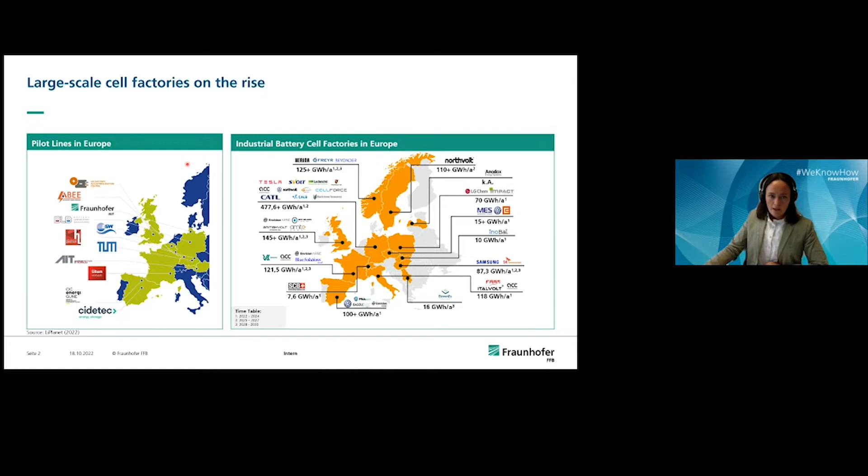The maturity of technologies can be defined by the TRL, the technology readiness level. While lab production tends to be in the lower TRL level, the large-scale production are on the higher TRL level. And the target of the Fraunhofer FFB is to map a range between a TRL 5 till 6 up to TRL 8 till 9, so that the technologies of different partners can be developed for industrial use.

As we are showing here on the slide, we are working together with some partners to implement new technologies and innovations into the production line. For example, we are working in the field of new production processes together with the RWTH Aachen, in the field of new battery concept with the Fraunhofer Battery Alliance, and in regards to new active materials, for example, with the MEET here in Münster. The target of the Fraunhofer FFB is to enable the technologies from these partners for industrial applications on a large scale.

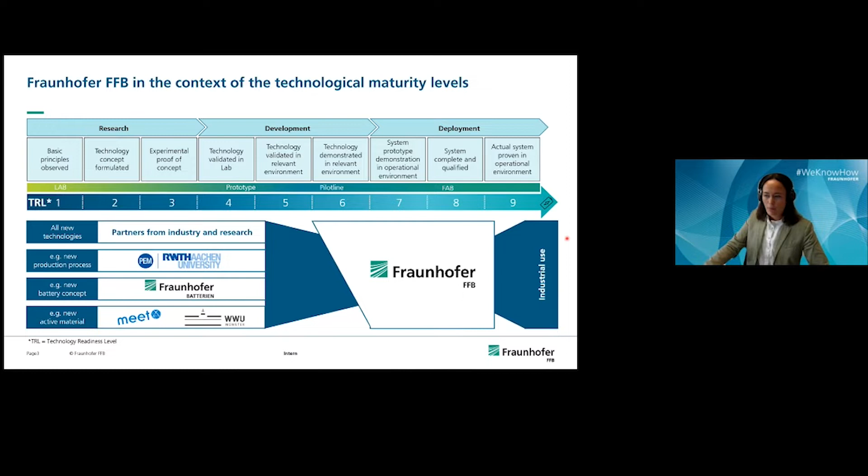At the beginning, the new technologies are further developed at the Fraunhofer FFB in so-called innovation spaces. Here we start, as I already mentioned, with a TRL 5 or 6, and the innovations or technologies can be operated in the innovation space totally on themselves regarding to the production line. So, for example, when we are developing a new drying process, we take the slurry from the production line, operating a new drying process, and then implement the dried electrodes into the cells from the production line. Therefore, a comparison is possible between the conventional process in the production line and the new technology in the innovation space.

When the technology is ready and fulfills the requirements of the production line, we integrate those technologies into the smallest production line at our equipment. Here we are operating with a TRL 6 or 7, and we validate the technologies in a running production process. When the process or technology is then ready, we optimize and implement it on a larger scale, and then we scale it up to the large scale of an industrial production to then run it in an industrial scale. So the Fraunhofer FFB maps the technological transfer and scaling process through diversified plant technologies.

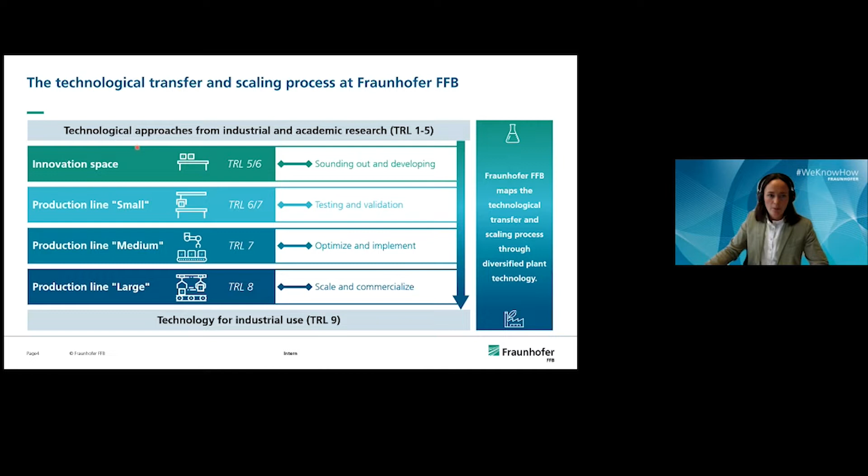To reach this target and to develop those technologies step by step, we need, of course, a big infrastructure. Therefore, we built up some equipment here in Münster at different buildings. We are starting in the electrode field with the largest production scale with two production lines on the electrode manufacturing side. And then we have additionally one medium coater and dryer with a speed up to 30 meters per minute, and the smallest line which is running with 10 meters per minute.

Additionally, we built up here three production lines for all three cell formats: the 21700 cylindrical cell, the pouch, and the prismatic cell. Theoretically, we could produce 7 gigawatt hours per year. This is the machinery capacity.

But realistically, we are operating this machinery totally differently in comparison to the industry. For example, we will not be producing in a 3-shift system. But for technologies and new innovative materials or processes or sensors, it could be possible to integrate the sensors or processes into the big scale and also validate them on a really industrial scale and also in a 24-hour system.

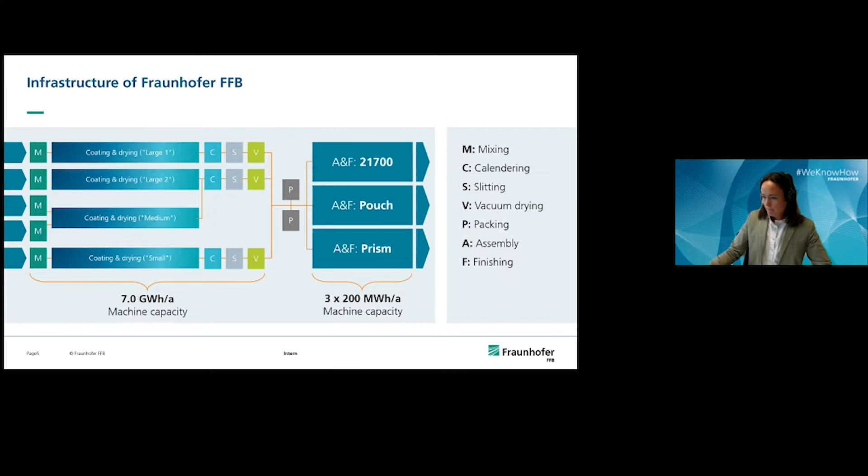Here we listed some process parameters of our different machinery equipment in different buildings. So we start today with the FFB workspace. This is a building already built up here in Münster. We rent a room, a dry room, a clean room, to build up some electrodes here at the space in Münster. Then the next building will be the FFB PreFab.

Here we scale up to a small production line. And here we are implementing the first innovations at Fraunhofer FFB. And then the large-scale production will be built up in the FFB Fab. Here we integrate the biggest equipment of our infrastructure. And also here we are producing all 3 different cell formats.

But of course, the conventional battery cell production technology also has its disadvantages and challenges and offers great potential regarding cost and energy demand, particularly in Europe. For this reason, the Fraunhofer FFB is driving a technology change in the equipment concept.

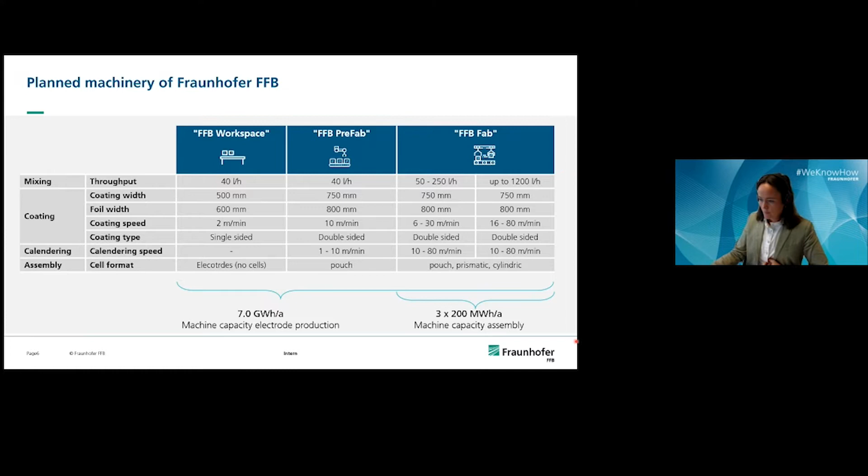For this purpose, a heat map was drawn up, as already presented by Mr. Degen, in which the main cost drivers in battery production were identified. In addition to the dry coating process, I would now like to show you how technologies are developed at the FFB from lab to fab with the example of the alternative drying technologies.

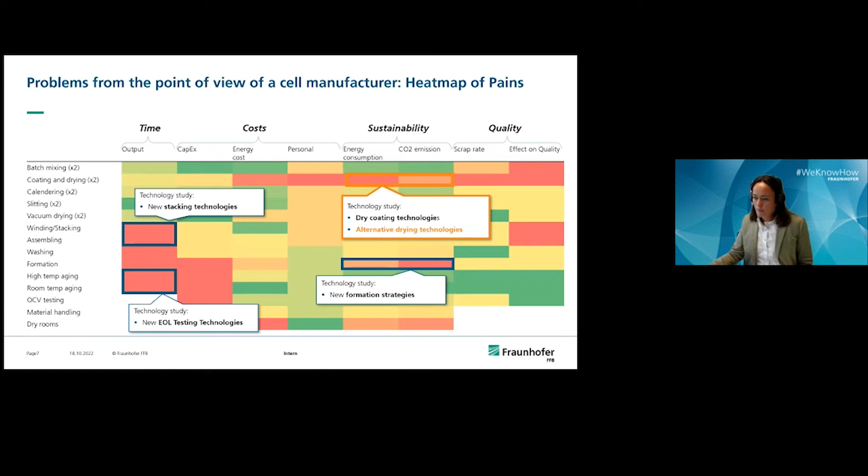Furthermore, the drying process needs a really long heating time to ramp up the dryers. So today we need more than 20 minutes to heat the dryers up to a process temperature of up to 80 degrees. So we need a long ramp-up time to run this process.

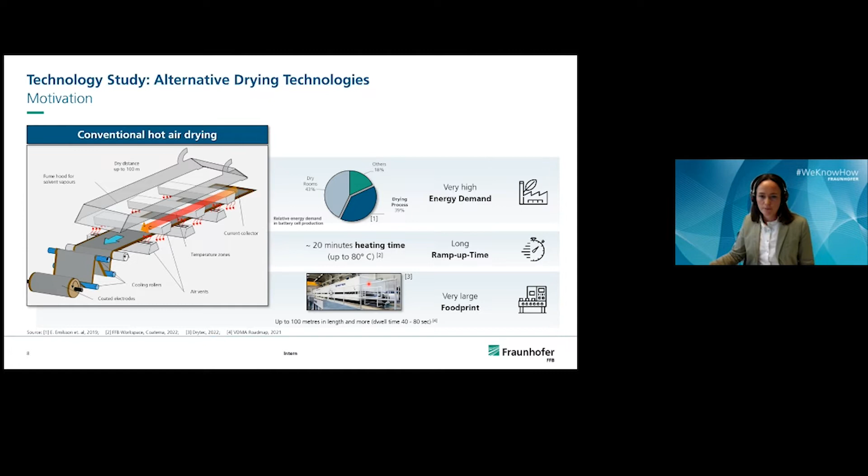And the last disadvantage of this conventional process is the very large footprint of the dryers. So today we need more than 40 seconds dwell time in the dryer, so we need more than 100 meters in length for the dryers. And this is a really big footprint in the cell factory, which we would like to decrease.

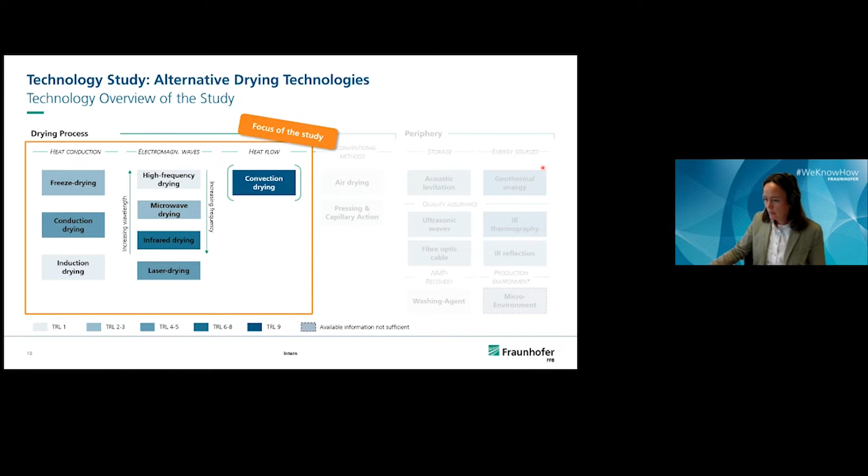And we compared some other technologies, for example conduction drying, induction drying, and also drying technologies with electromagnetic waves, for example microwave drying, infrared drying, and laser drying. As a result, we compared these technologies regarding the parameters development status, cost efficiency, process performance, and product quality. And here we benchmarked the technology alternatives.

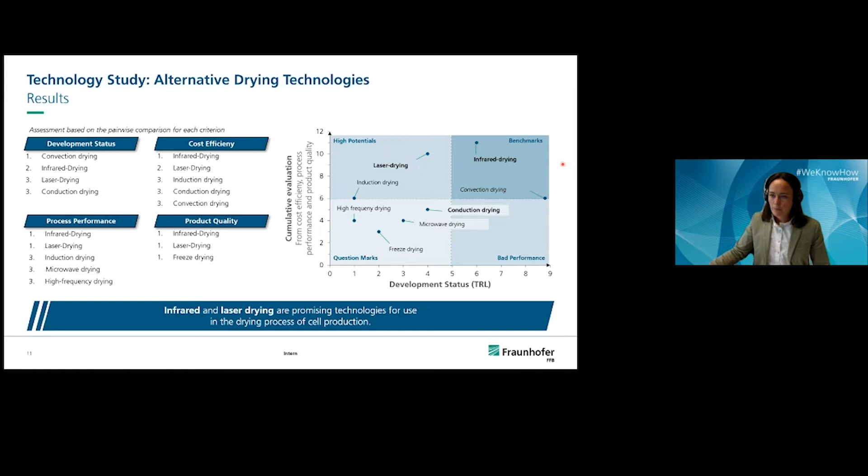And as you can see, laser drying and also infrared drying are the most promising technologies for us to optimize the drying process. Laser drying, for example, has a really low energy demand, as does infrared drying, and they have a really fast ramp-up time. When we compare both technologies, with infrared drying we have an infrared emitter. This infrared emitter has electromagnetic waves in the near infrared range between 800 and 3000 nanometers.

And yes, it's suitable for both anode and cathode applications and is already used in series production as a booster. So the technology is not ready for completely drying the electrode, but it's integrated in the conventional process to speed the process up a little bit.

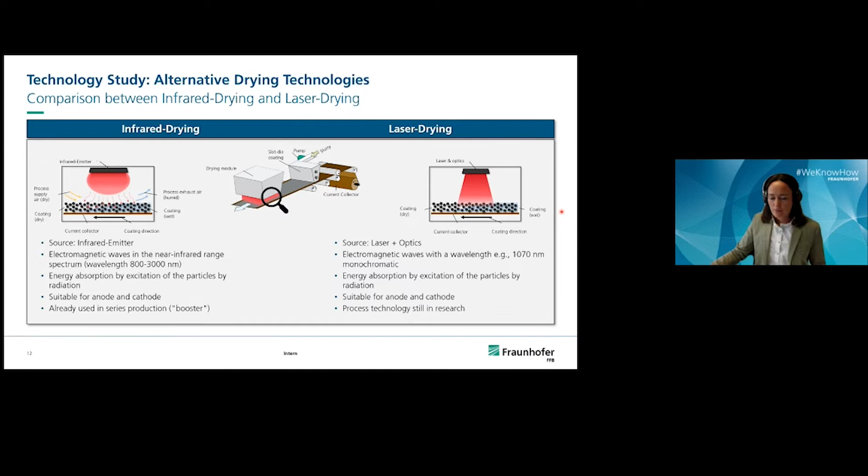Then the laser drying: we are using a laser and an optic to heat the electrode up. Here we are working with a wavelength of, for example, 1070 nanometers. And this process technology is in research. It's not integrated in a production line today. So these two technologies are at different TRL levels, but both have advantages regarding the energy demand of the drying process in battery cell manufacturing.

Here we compared both technologies regarding the defined parameters in the technology study. As I already mentioned, the development status of infrared drying is a little bit higher because it's already used as a booster in a production line. The laser drying is in research and first prototypes. So here we have a lower TRL level.

The infrared drying has the advantage that it has a really low investment and really high energy cost efficiency. The laser drying also has really high energy cost efficiency, but the investment for the laser is a little bit higher in comparison to the infrared drying. The process performance of both technologies is really high, so we can switch the dryer on, and then in a really short time we have the process temperature we would like to have.

The laser is a little bit better in process parameter accuracy, so we have a really precise energy input through the optics into the electrode, in comparison to infrared drying, where we have more or less a bundling of the heat. Both technologies have more or less a good product quality at the end of the process, but we are still in development to reach the same product quality in comparison to the conventional process.

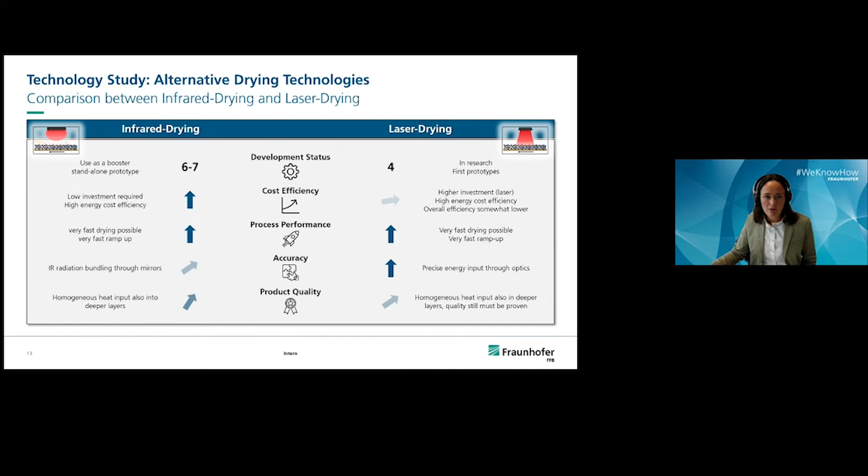After the technology study, we decided at the Fraunhofer FFB that both technologies are really interesting for us to be integrated in our production line. So we started two different projects. Of course, the infrared drying, as I already mentioned, has a higher technology level. So here we already integrated the infrared drying into our production line in the FFB workspace. This will in the future also be the smallest production line at Fraunhofer FFB.

So we integrated the infrared dryer here at the beginning, and we already have some results of the validation of this technology. We reached a reduction of the energy of up to 85%. We could already reduce the dwell time to 13 seconds. In the conventional process we have more or less one minute dwell time, and therefore we can also reduce the plant size of the equipment, because with a lower dwell time we don't need a dryer length of more than 100 meters.

And the last advantage of the process is the really short ramp-up time. In comparison to the conventional dryer, as you can see here in the picture, with infrared drying you don't need 20 minutes to heat the production process up. In a few seconds we are ready to dry the electrodes with the infrared drying process. So with this technology, we would like to scale it up to a much higher production scale with more speed, so that the infrared drying process can totally substitute the conventional drying process.

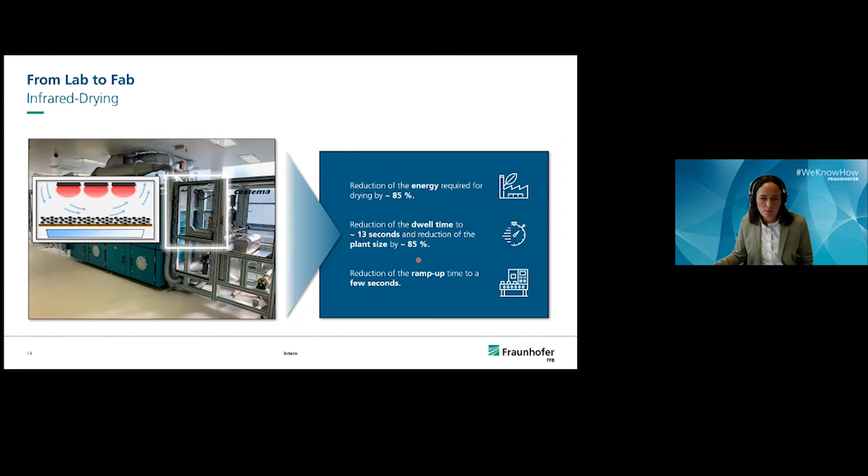With the laser drying, the TRL is lower, so here we are working together with some partners at lab scale. In the first step we implement the laser at the production site at RWTH. Here we can work with a coating speed of up to 2 meters per minute. When this is ready, it will be integrated in a line at the Fraunhofer ILT. There we also have a small pilot line with up to 10 meters per minute.

And we hope that this technology can fulfill the requirements of a production line, and that we will successfully develop the laser drying into a production technology. Then we could integrate this technology into our line at our site, hopefully in 2 or 3 years.

And here we can then implement it and validate technology up to 30 meters per minute, and then scale it up to the fast speed of the production or industrial scale. I hope I could give you some examples and show you the approach at FFB, how we would like to scale innovative technologies up to industrial scale.